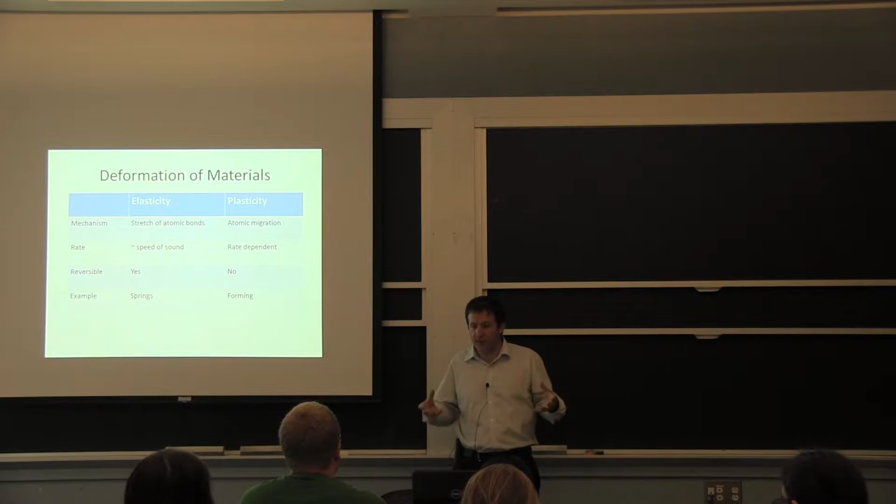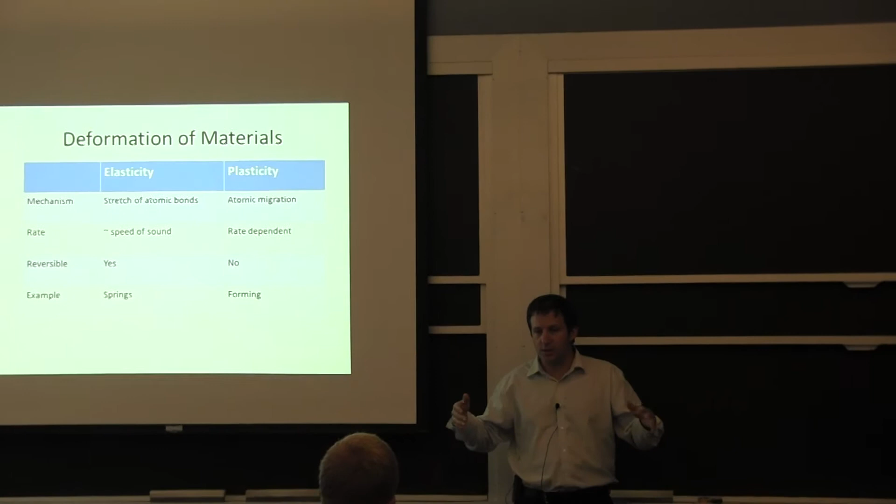So the summary I was presenting to you is this idea that in plasticity, because you're moving dislocations, because you need to have relative movement inside the crystal, it's rate dependent. It doesn't happen instantaneously. If all you want to do is stretch bonds, it's acting like a spring. But when you want to coordinate the movement of the dislocations, it becomes time and temperature dependent.

And that's why we do high temperature processing, because we want to make sure there's enough movement of dislocation so we don't damage the material as we're deforming it. We can get a lot more strain in the material without inducing damage at high temperature. And the other thing I mentioned briefly last time, at high temperature we get more diffusion. So we get to eliminate a good proportion of the segregation issue by being hot enough and diffusing between the core and the surface of the workpiece to homogenize, and that's what it's called - homogenization of composition.

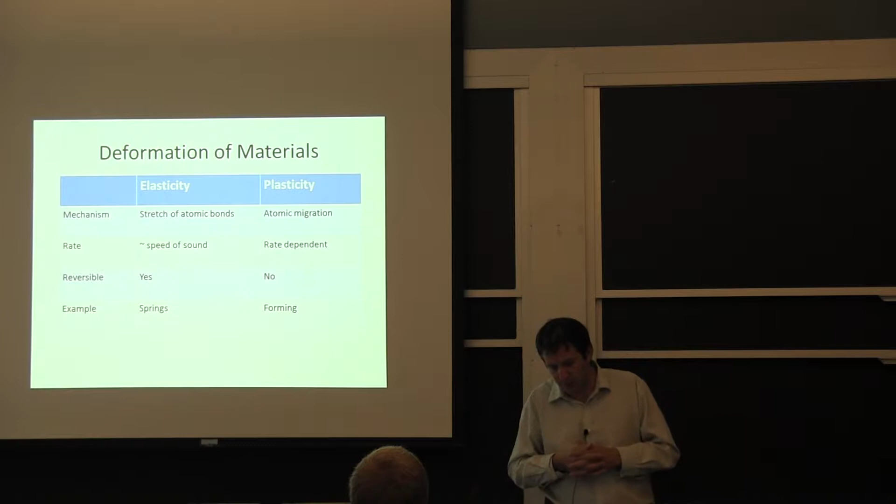Now, the one slide about elasticity - the reason I do this is I remember when I saw this slide, it helped me for a long time. I've learned engineers, if you graduate with a bachelor degree from any good school in the US, you're likely to make some of the mistakes because you forgot about some of this.

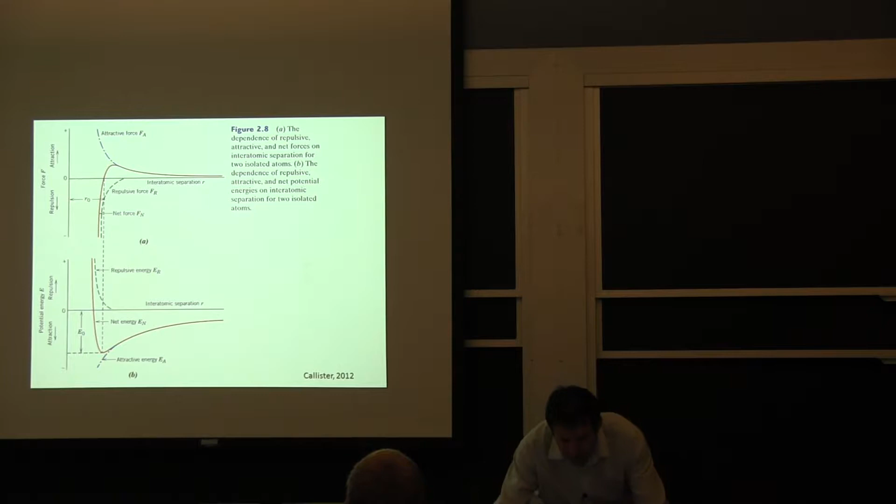What I want to emphasize with elasticity is it's the competition between attractive forces and repulsive forces between the atoms, and it's unbalanced. What you can see here is the repulsive force goes very, very high, as opposed to the attractive force, and that makes the whole potential curve non-symmetric.

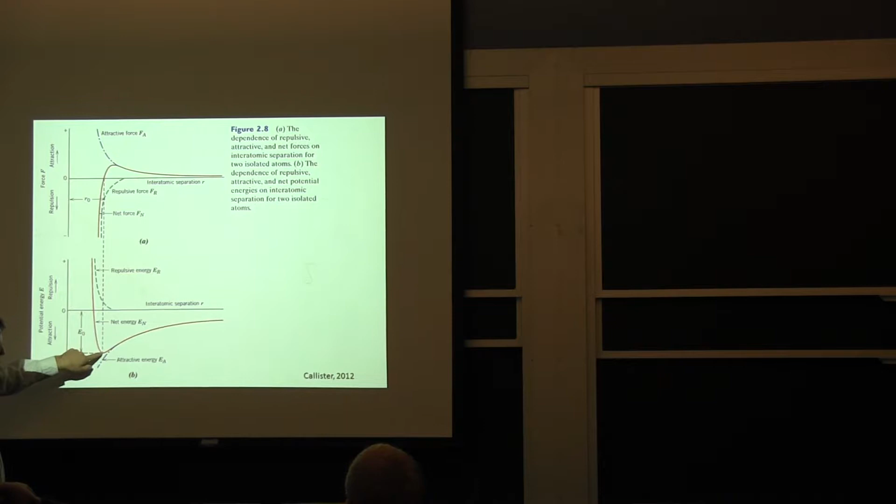The fact that it's unsymmetric, you can use this to explain why metals expand with temperature, because as you increase the temperature from that low energy point, the average between the two curves goes to your right. If you have more thermal activation, you're willing to move like this, but your average distance between the atoms goes up. So you can use this as a simple exercise to understand there are more consequences trying to bring the atoms together than to spread them apart.

And that also explains Poisson's ratio. If you pull on a material in a tensile test, you get an elongation in this way, and you get lesser contraction in the other way, because in the contraction the bond distance is going down, and the material doesn't want to do that as much - it's willing to go to a greater distance instead. So that's why essentially in elasticity the volume increases.

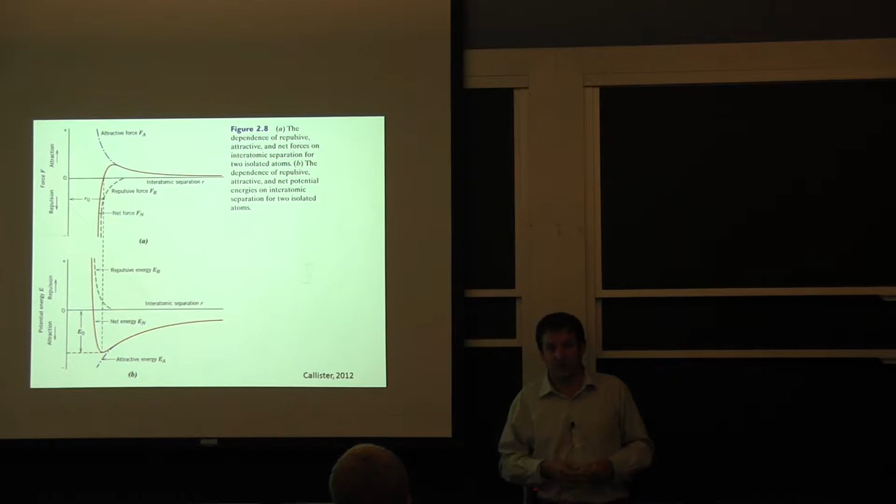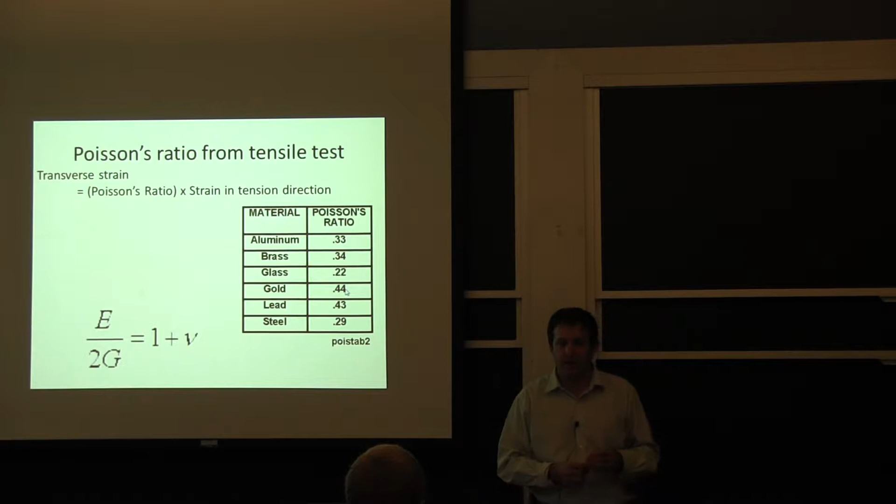These are some typical Poisson's ratios. If it was exactly incompressible, with no volume variation, all these Poisson's ratios would be 0.5, and you can see that they're all less than that. So there is expansion going on when you have multi-axial loading.

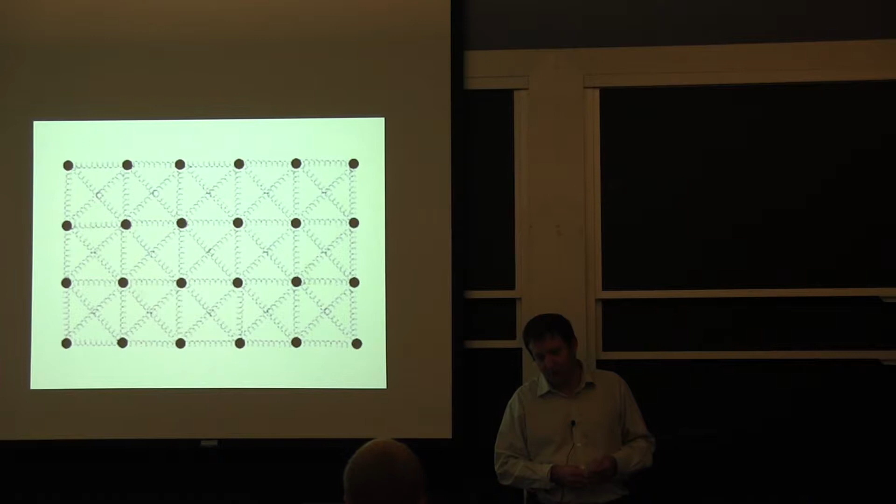This is the analogy I used before with engineers - I don't think you need it. I think the real explanation is that potential curve with respect to why we get more extension in elasticity.

So our focus, again, is plasticity for this class. It means that we go beyond stretching the bonds - we start having the movement of dislocations, they multiply, and I wish I could give you six hours on dislocations, but I don't think everybody will appreciate it. So I'm thinking about talking about it a little bit because it helps explain some of the hardening mechanisms. We're going to cover a little more dislocation detail in the next class.

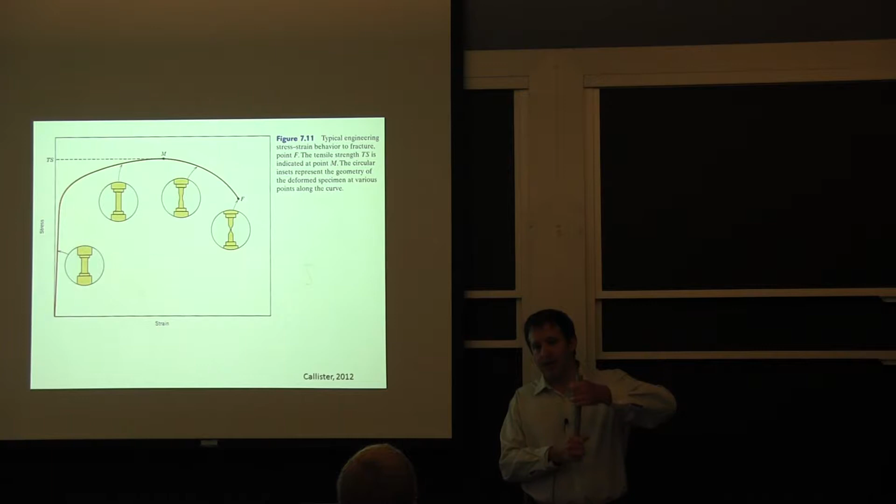For now, we're going to deal with the materials at the macroscopic level. So if I take this bolt, what will happen if I pull on it - it will deform and keep its shape because it's hardening. Then eventually the metal inside is going to start tapering down in terms of hardening rate, and that's where you get your instability.

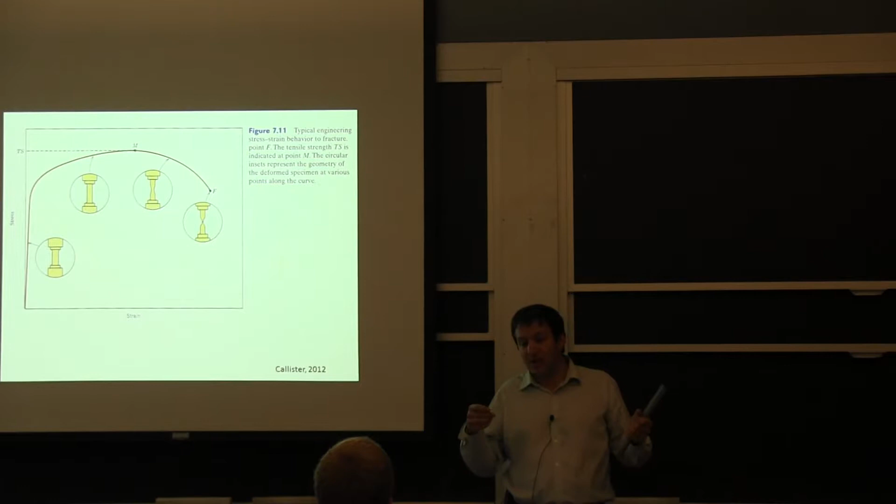If you're dealing with rubber, the instability will take a very long time to come up because the rubber keeps getting stronger and stronger as you pull on it. The metal, at some point, gets saturated with all the dislocations, and therefore the curve goes down - you have less hardening as you keep pulling on it. Eventually you form that neck, and the deformation localizes.

One thing that especially structural engineers and mechanical engineers have a hard time understanding is the metal doesn't get any softer. It's not because you see the peak here that it means you have softening of the metal. What happens really is because the deformation is localized, you have a reduced area.

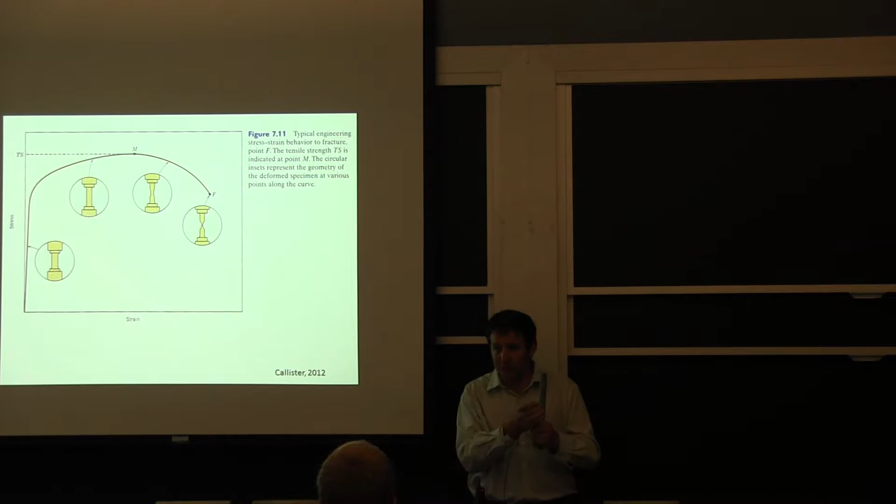So if you correct this plot based on the actual area, because this is always reported from an engineering standpoint based on what the area was to begin with - nobody in a regular test figures out exactly what the section is in that neck - if they did, you'd get something like this.

And we can do that reconstruction using these equations here, covered in most books, where you change from the nominal elongation to the true elongation by using the actual area, and same for stress.

You take the load divided by the actual area as opposed to the area that you begin with. So metals harden, especially at ambient temperature. And it becomes a difficulty explaining to some people.

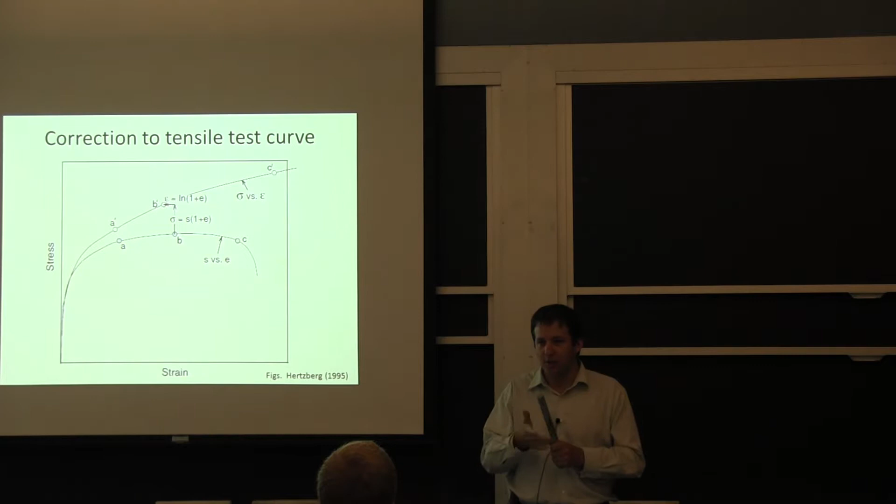They think, especially with the age of finite element analysis, you run a finite element analysis, you get 15% deformation. Oh, maybe it's breaking. Well, it depends. If you don't have tension, no, it's not breaking. It's only the tension part. It's this instability that makes the tensile elongation. There's no relevance with respect to the intrinsic deformation of the material.

The reason I bring it up, this is just saying it will keep hardening, and the rate is going down. That general law, the power hardening law, is a good way to curve fit a lot of metal behavior. Polymers doesn't really work, but with respect to the metals, this general way of taking a log plot, taking the slope, you get your strain hardening exponent essentially, and it's very useful.

The way eventually your hardening becomes low at ambient temperature. I think it's good for you guys to have an idea. When you reach 200 or 300% strain in steel, for example, you have so much going on, it's filled with dislocation that even if it's ambient temperature, there will be recovery. There will be recombination of the defect. So eventually this curve will saturate. But it's at very high deformation value. It's involving essentially a lot of strain and very, very high stress.

You're likely to crack depending on your exact working condition. If you try to reach a steady flow stress, that we're going to see in hot forming.

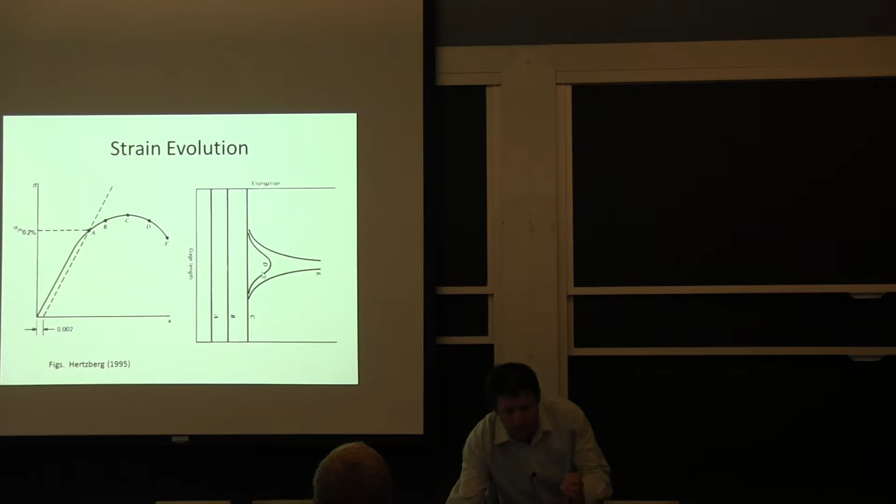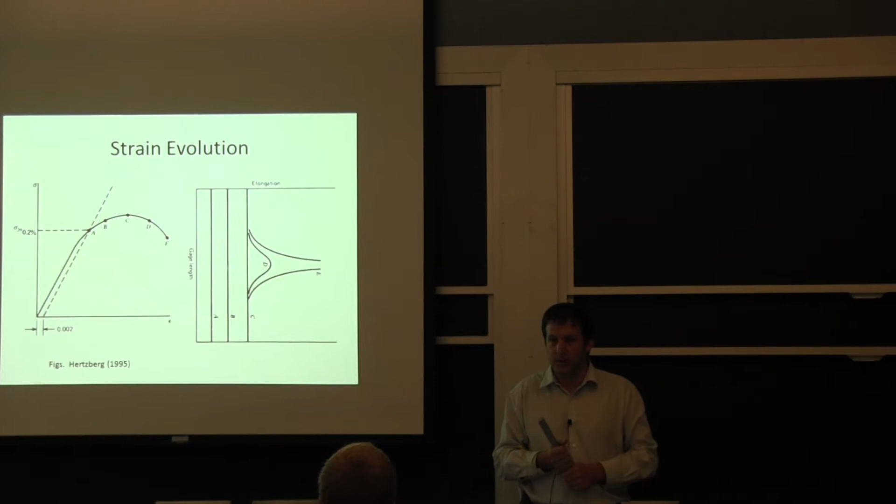So in this case in the middle, that's where the deformation localizes. Your strain is starting to go up here, and you're done deforming outside the neck. And that also happens in polymer. Polymers will, if they're ductile, form the neck, with the difference that the neck will also stabilize, and then you propagate the neck up and down to reach the full deformation height. We'll talk about polymer at a slightly different time.

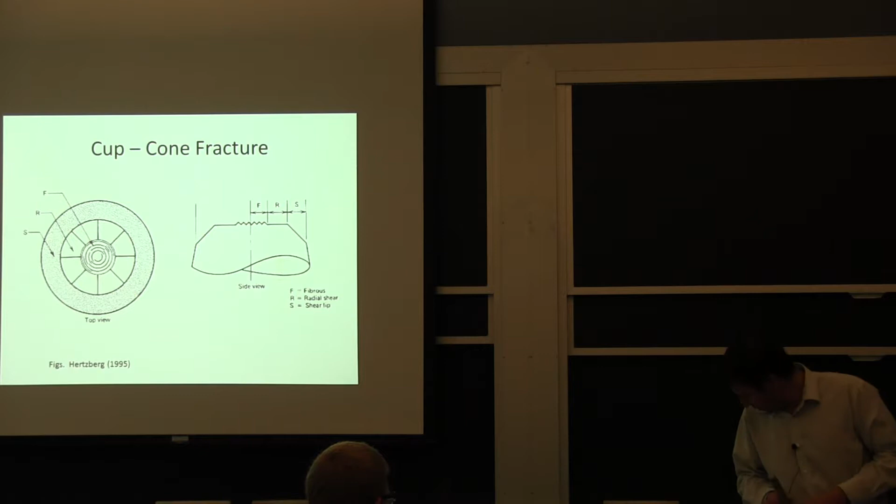I don't have that specimen here. I was looking for it this morning, but what happens with a round specimen, I'll draw it here. It's about the best way to do it. With a round specimen, say if I pull on it, I got it machined, and everything is going on very nicely at the beginning. It's all deforming homogeneously, so it stretches. We're at 20% elongation, started here with our gauge length, we're at 20% elongation, and then we start forming that neck.

It's reduced in area here, and when you look at it on a plane, eventually it will snap. Typically, you can get to a local area that's about half of what you started with as the nominal area, exactly where the crack propagates. And the way the crack will propagate, if I look a little bit more at an angle at this sample, it will look like what we call a cone and cup.

So you'll have this essentially going perpendicular here. This is where it started. It will normally snap somewhere in the middle because you get more tension there with the stress concentration as you're forming the neck. Then when you get close to the edge, this will tend to be at 45 degrees. So if I do a side view, it will look like this. One side is going to be like this, and then you have your neck.

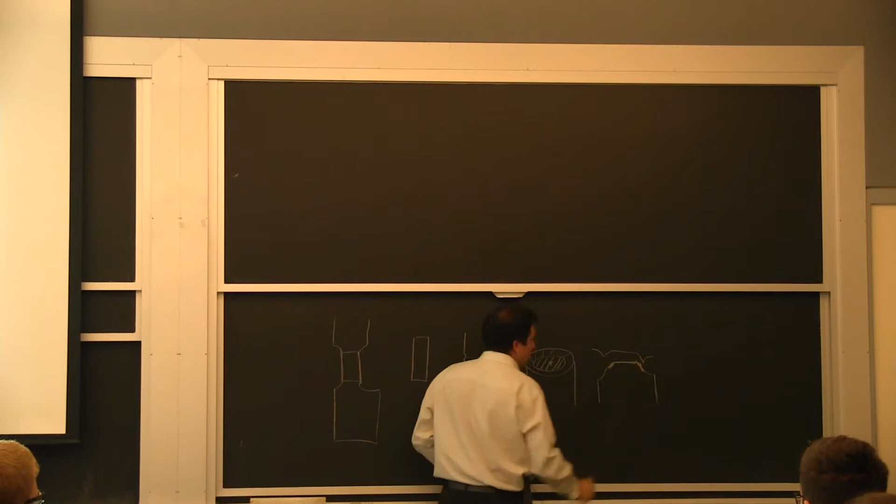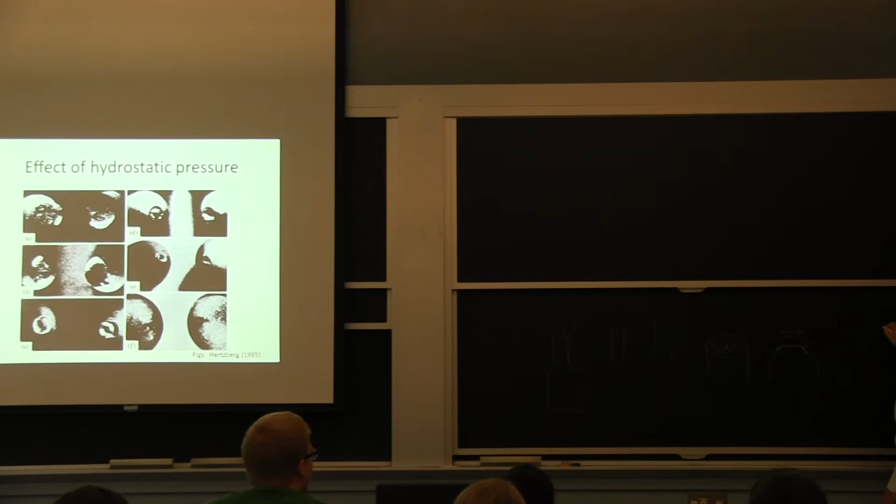The reason I mentioned that is I wanted to show you what happens when you put pressure. Now we're looking at an actual sample, and you can see initially, if you do it just in the lab at atmospheric pressure, you get this zone here to be fairly big. So we're looking at this flat portion here at ambient pressure. And the flat portion, if you keep going through this image, this image, this image, all the way here, there's almost none. This sample here at the extreme is just looking like a 45 degree here with our little fillet like here.

What does that mean? It means if we're going to deform the material at very high strain and avoid forming little cracks in it, we try to be in compression. It's one of the main reasons, especially at very high strain, for doing everything in compression—rolling, extrusion, forging, you name it. You try to make sure you don't have areas that are going to deform in tension.

In forging, it can be a problem. So when you're making that head, this is made with a round bar, and a lot of times it's cold formed to make the exact shape, and it will even include the stamping on it. Most of the time there are multiple forging operations to lead to the final geometry, and the reason is if you try to do it all at once, you'll get tension somewhere. So you have to go progressively. It has a galvanizing on it.

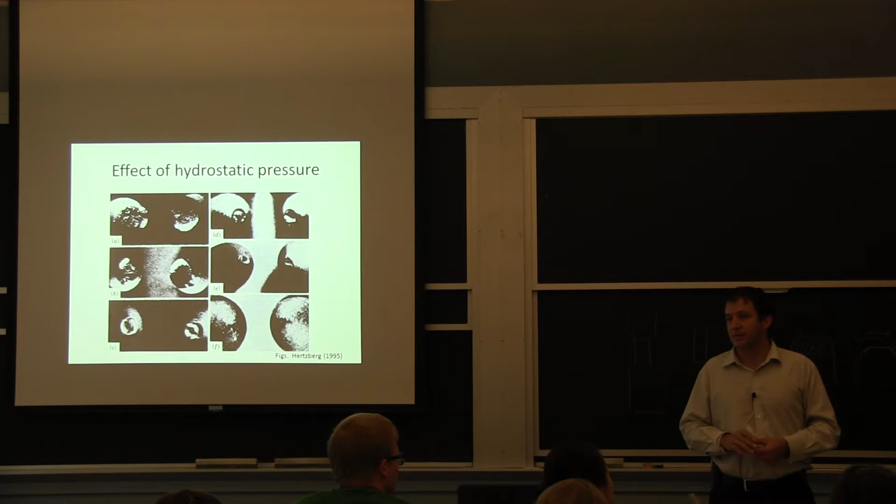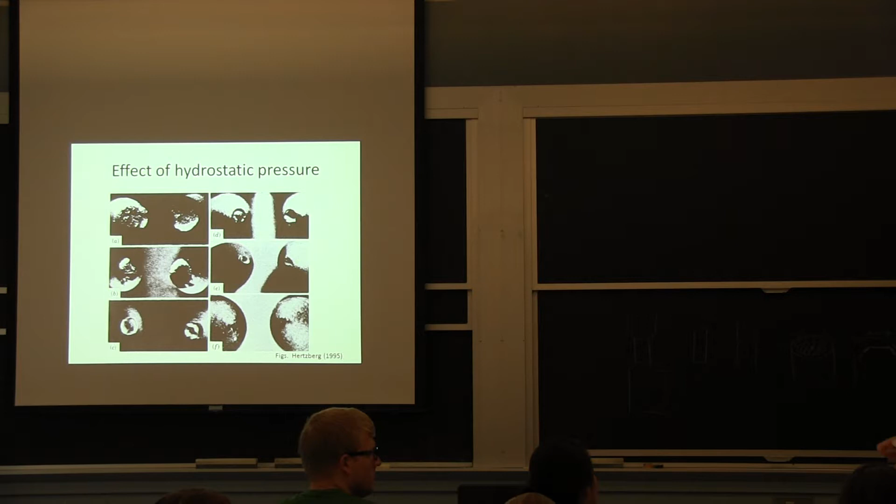It's one of those projects where I did a failure analysis, and it didn't fail through any of this. It didn't neck—it failed as a very straight cut. What happens if you have a rod or something that doesn't have a circular cross-section? We'll get to that—I have a video to illustrate that, it's a very good question. So essentially, the piece you're looking at, I cut it in 3 pieces. You've got the first part, this goes on, and then you have the thread, and it failed at the thread without any necking. That's something we talk about more in the second half module of the class.

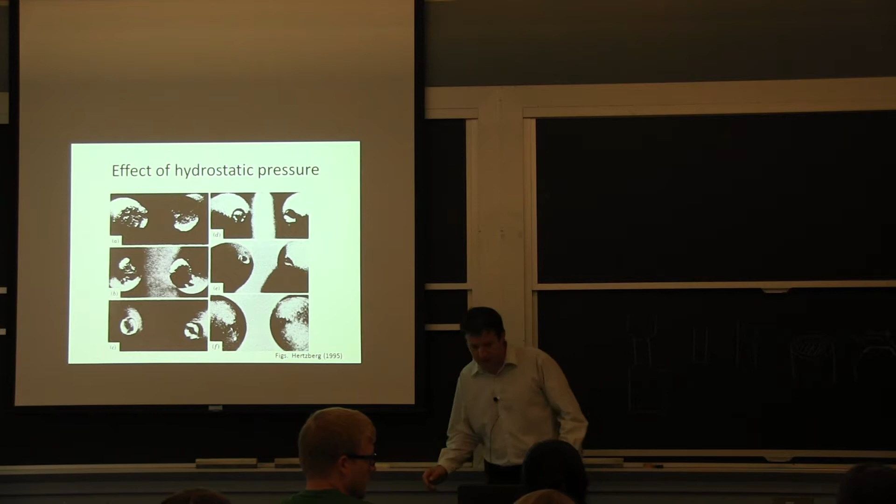So in terms of how we do this deformation, forging is that example here with the head. Rolling is what I'm going to talk about, and most of the time to do beams, you do a form of rolling, and I have a little video to show you on that. Wires, you can draw. Drawing has advantages where you can control the dimensions very precisely. At the same time, there's only so much you can pull.

So you can pull and push. There are a lot of things you have to do to make sure you get exactly what you want. Extrusion is common for metals and polymers. It's used a lot for aluminum—these were extruded, and I'll talk about that separately. Deep drawing is how you make the aluminum cans for soda and stuff.

So you start with a flat sheet and you essentially put it between a die and a punch to extrude it, and that's why the wall is so thin, because it gets stretched. So deep drawing is one example where there is tension during deformation, and you have to be very careful in terms of what the material hardening is. The advantage of aluminum is you can tailor it so it will harden quite a bit, and you want that. So you wouldn't try to do deep drawing at high temperature—it will just break on you. You need the hardening to do it.

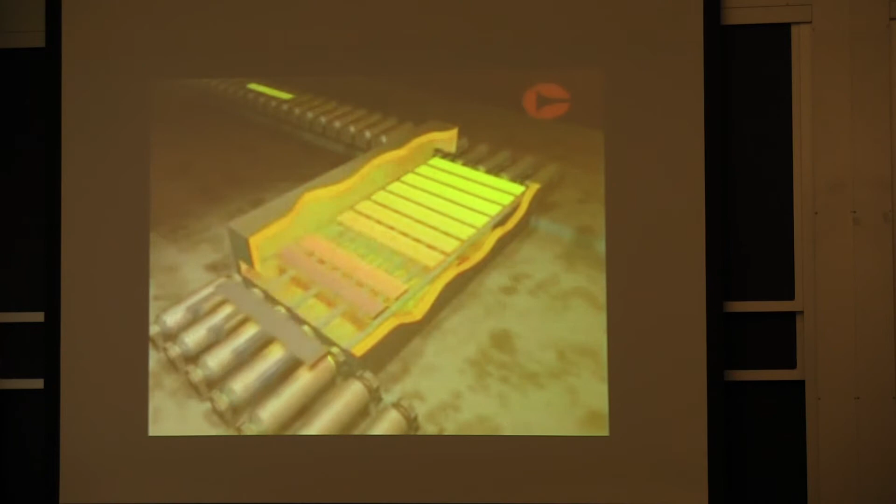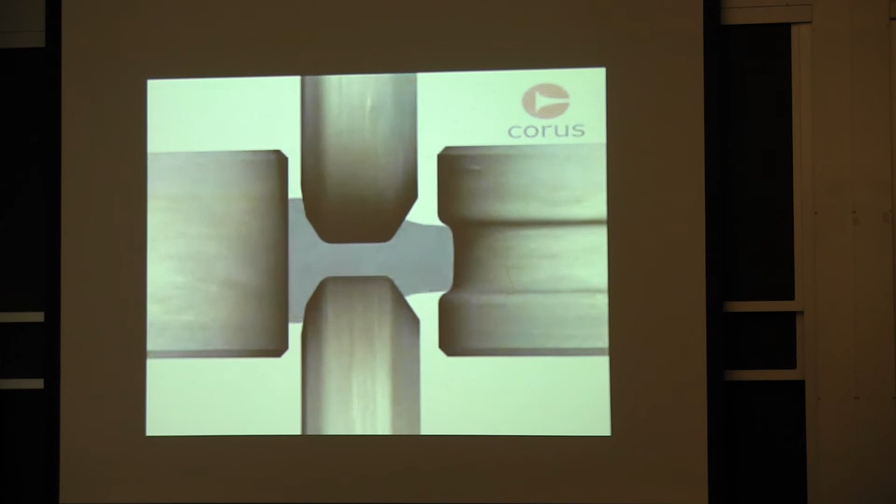Steel is highly resistant to shaping when it's cold, and for that reason it is generally rolled while it's hot. You preheat the metal before you start deforming, and then a lot of the traditional processes from there will be autogenous, so you wouldn't try to keep heating the metal. By the deformation, it reheats itself. That's how you make the beams in different shapes.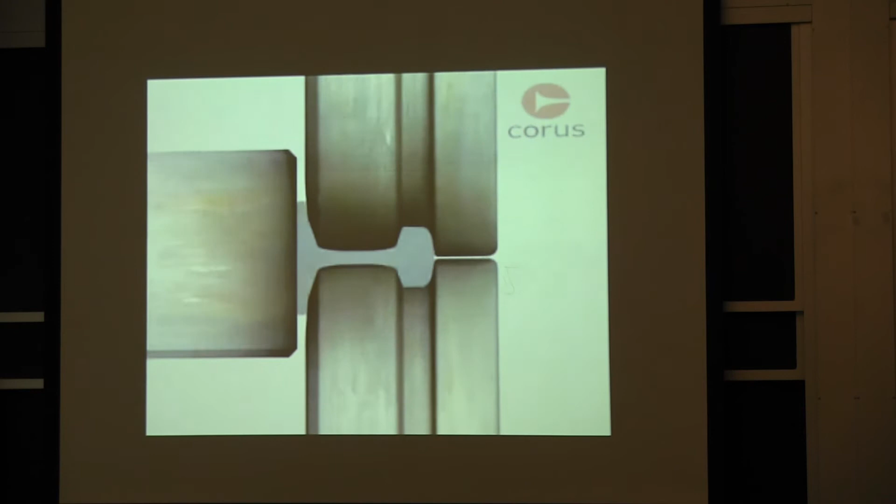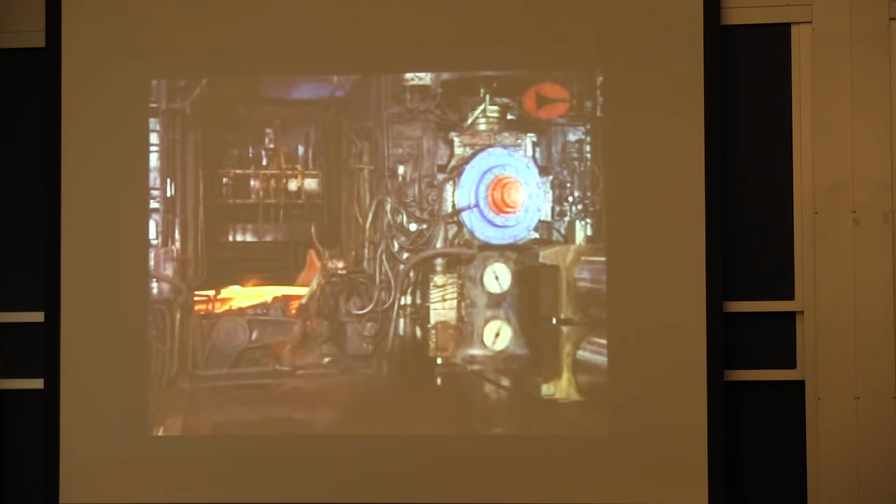Forces of tens of millions of newtons, equivalent to a weight of thousands of tons. The rolls therefore run in massive bearings, mounted in housings of enormous strength and driven by powerful electric motors. These are known as mill stands.

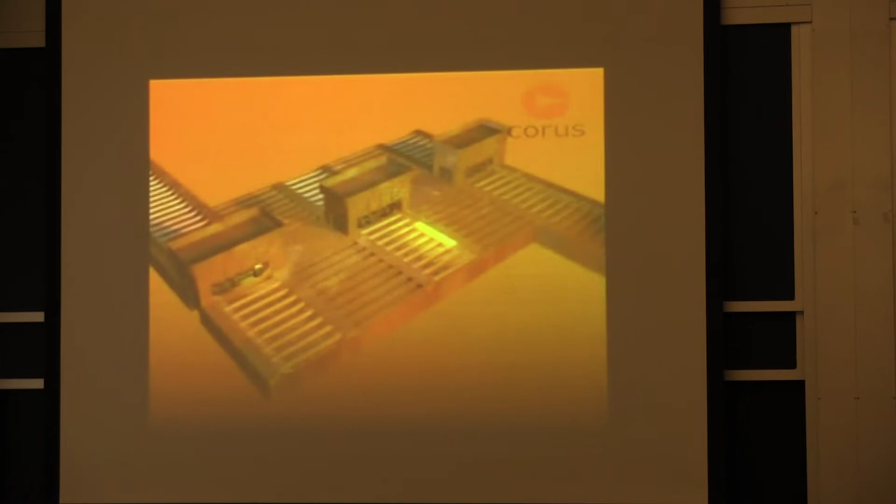The layout of a rolling mill can vary. The rolling design is definitely not something we need to get into, but you have to think about the radius of your roll, which is going to affect how much reduction you can take at each pass. That's why they have different roll diameters.

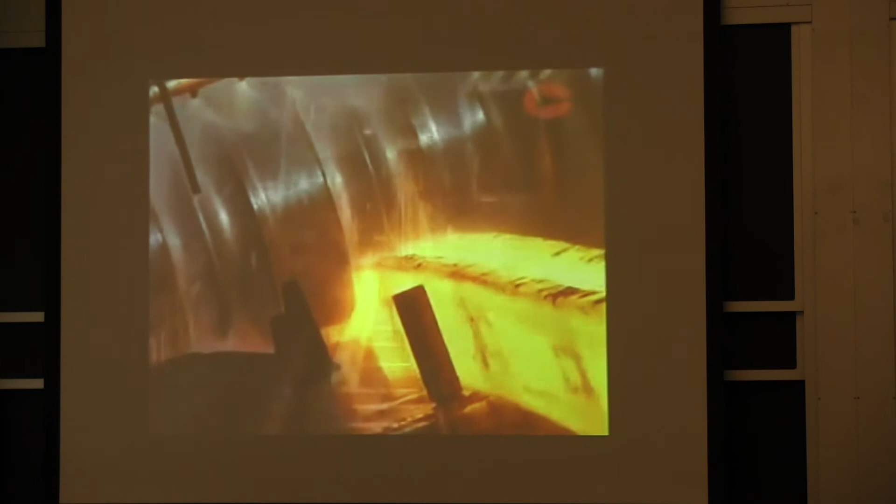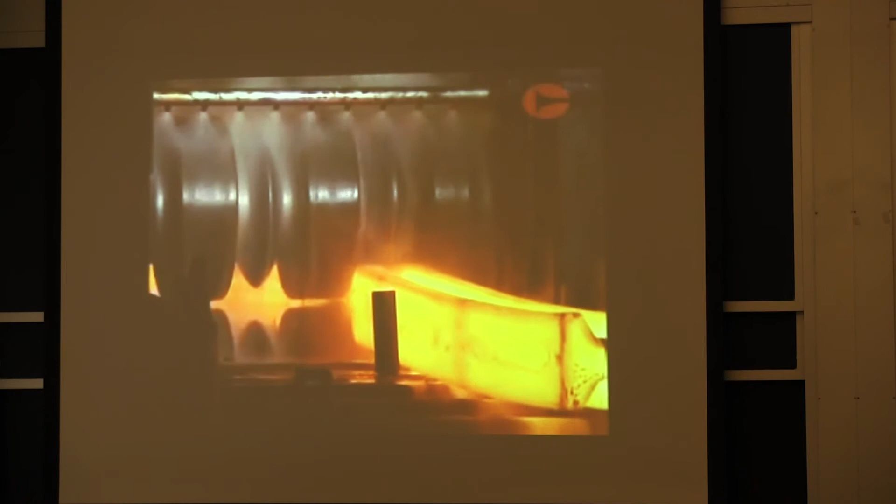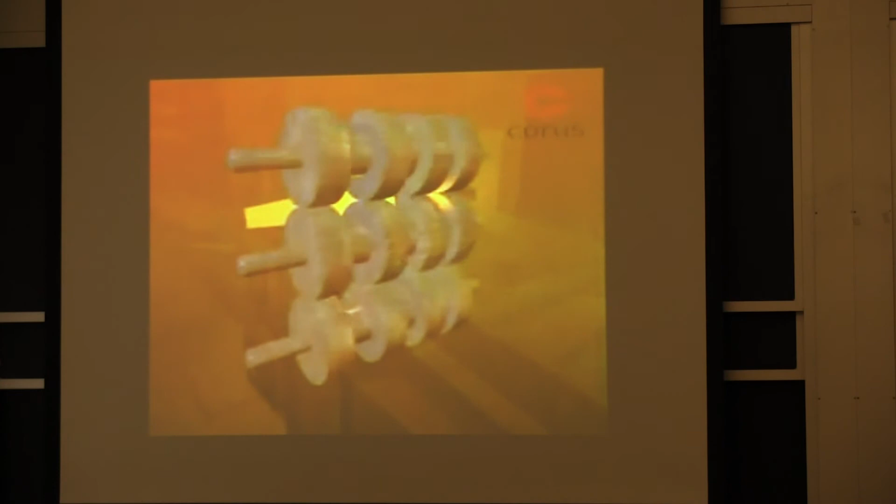Another key aspect: as you keep reducing the section, you have to go faster, because now you have more surface area as opposed to volume, and therefore you're extracting the same heat through radiation but need to produce more. These processes typically start with a big piece, moving it slowly and maintaining the temperature. As you keep reducing the section, all of a sudden it starts flying around—like with the springs for suspensions, when you get to the smaller diameter, it flies around at very high speed.

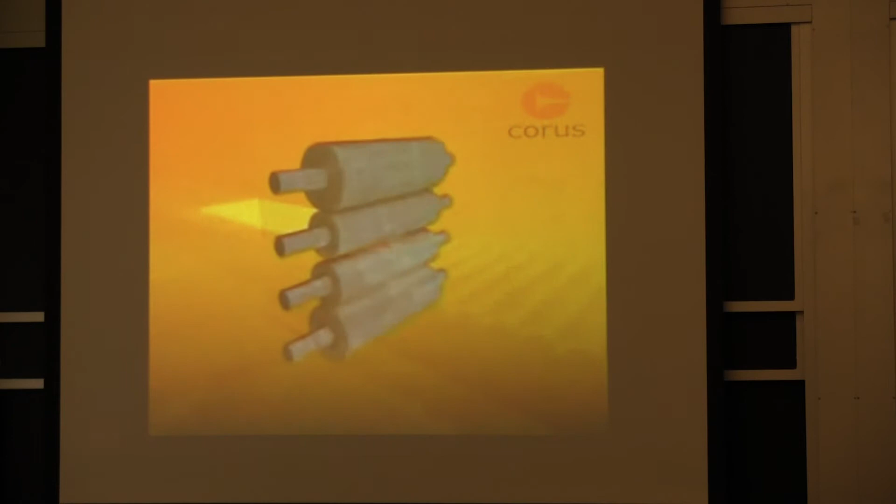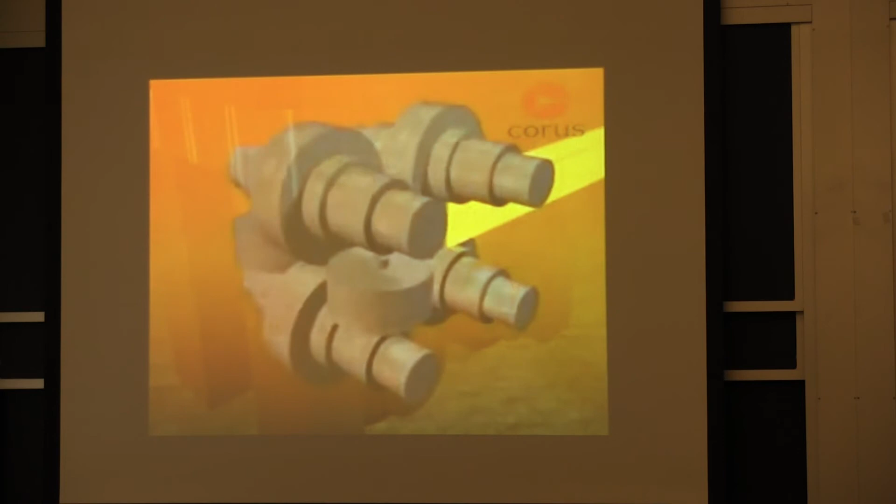What else can I say about this? You can do a lot of shapes, but you have to put in a lot of capital investment. Making these rolling mills is very expensive. That's why the beam I circulated around was not made by any of this high temperature deformation processing.

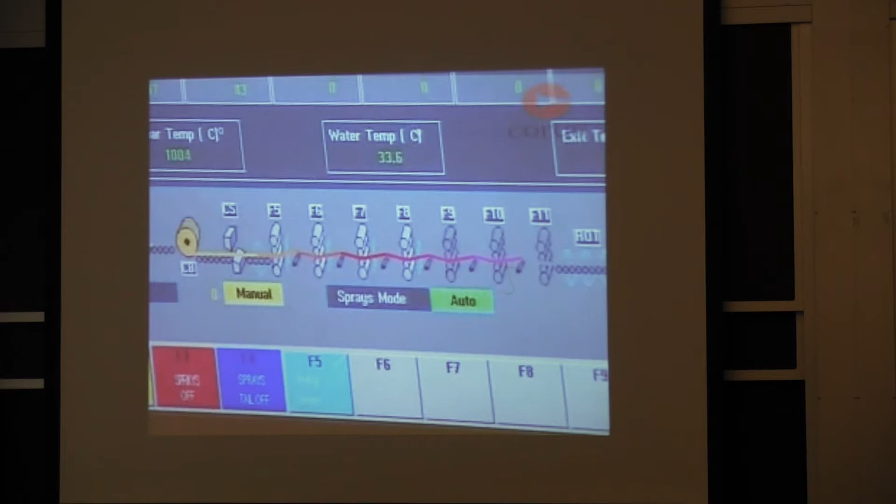It had three plates, and in this case was laser welded together. It's more of a prototype. In reality, what happens in custom fabrication is people will use, instead of laser welding, submerged arc welding, which allows you to make a very big weld in one pass. So there are portable units on construction sites that take the plates and make any beam you want from it.

It's not as good quality as rolling it, but you can definitely get custom shapes, and you don't need as many different material supplies. It's applicable if each piece isn't reproduced in much volume, so you're better off just buying the stock plate and making your beams. It introduces deformation from the cooling of the weld and all sorts of other issues, but in some cases it works—no reason to make it more expensive or complicated.

In rolling, the size of the roller matters for how much friction you get, because the power for moving the metal is provided by the rollers—sometimes it needs to be a very strong motor. One of the criteria: at your point of contact, you start at an angle alpha between that point of contact and the center line—this is the main angle—and you want to be able to, by friction, get the metal engaged between your rolls.

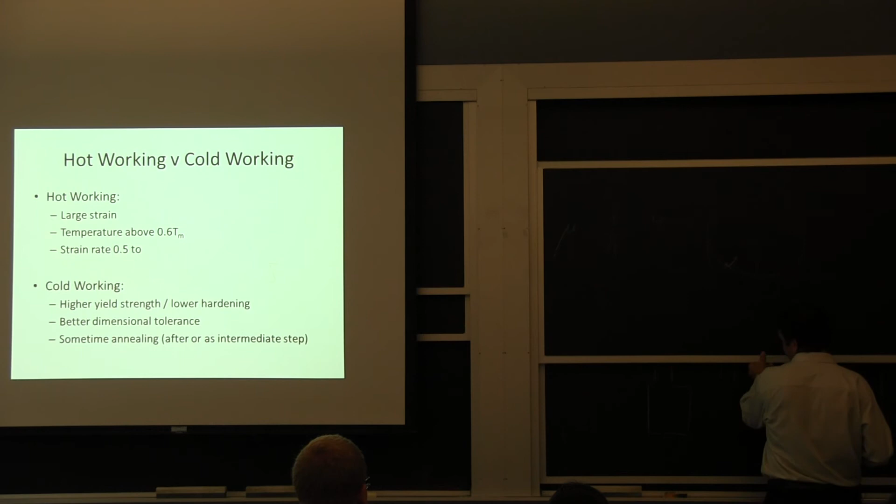The strain rate starts at 0.5 — that was not completed. When I say 0.5, it's essentially 0.5 per second. It's fast. So 50% per second is kind of a lower bound for these deformation processes.

That's why you see things moving around. Now, it starts a little slower, and the reason is you don't want to heat too much your workpiece when it's big. And as you keep going on, it keeps going faster.

Hot working is the way to go to homogenize the structure and get a very high deformation ratio, starting from something this big down to a plate that's a quarter inch or less.

The main drawback is it's hot, and you may have seen in the video at the end they spray the hot metal to cool it back to ambient temperature, because if you cool the stainless steel slowly, and there are a lot of metals like this, you can get some brittle transformation — you can essentially sensitize stainless steel. There are a lot of reasons for not cooling it in the slowest possible way.

What it means in practice is you don't have the wall thickness tolerance out of a hot rolled sheet that you get out of a cold rolled sheet. The cold roll is really, you deform it, you let it go off the roll, and that's it. Nothing else happens. So you get better dimensional control over cold worked sheets as opposed to hot roll sheets.

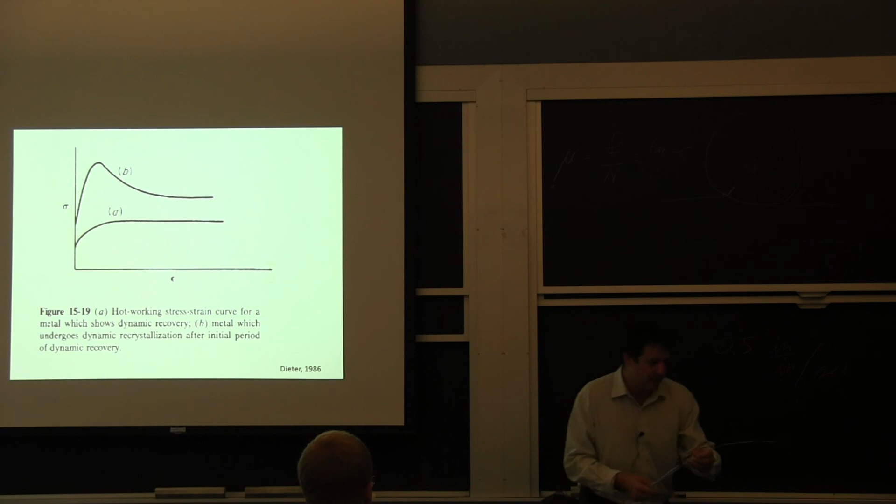It's kind of a rule of thumb, and you can have more than that between your starting material and your final product. So I have these tubes here, and that's a project I've been working on for a medical device. What happened is they want to use this as a double layer where you supply a liquid into the inner tube.

It gets to the end and it's pressurized here, and when it's exiting from these little holes, the pressure is going down and it becomes a gas. It's cooling down, and they use that to make ablation on the heart.